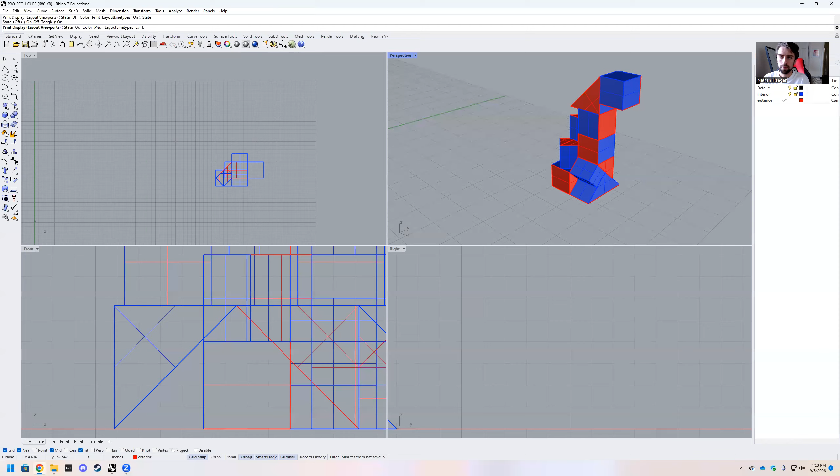Hi guys, I am going to walk you through what you're going to want to do to generate the line work as well as starting on your black and white and colored axons for project one. So we have some towers that you guys have designed, right? These are the ones I made in my last video.

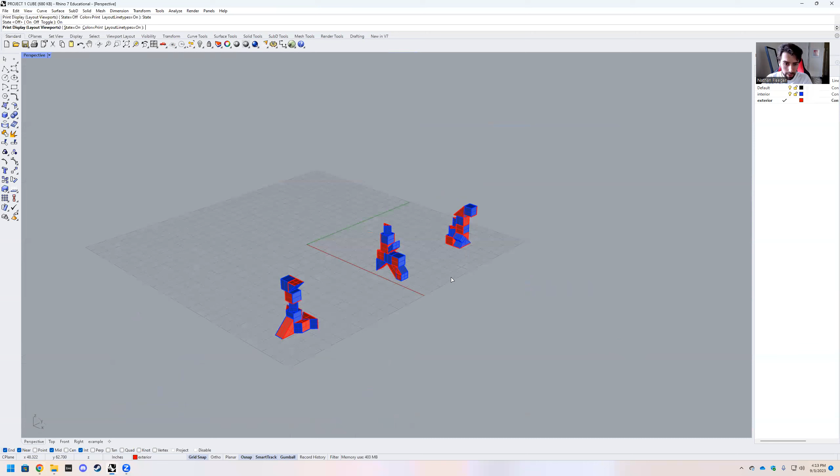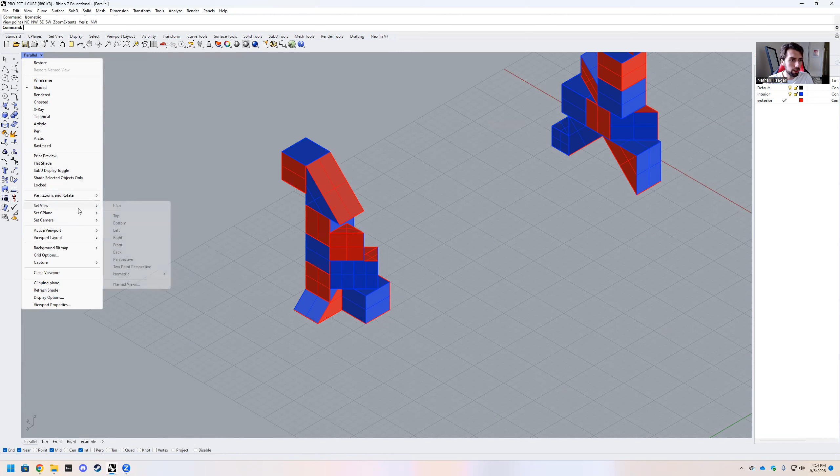And what we're going to do is we're going to start by changing our view from perspective to isometric, right? And so this is what we call the parallel view. And this is just a way for us to work in parallel, right? So an ISO is specifically one of these four views, right? So I had picked Northwest, and I kind of don't love the angle of this tower. So what I can do is I can rotate it 90 degrees.

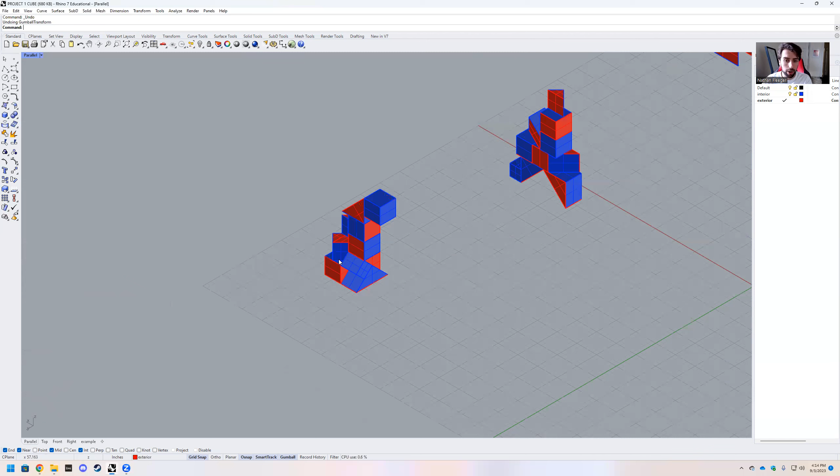Not quite what I want. Another 90 degrees. I think this is more of a cool angle, but let's just see what this looks like. Yeah, I think I liked it last. So if I undo, I really like this view of this tower. And so what I would like to do is zoom in on this. And this is essentially my axon. I want to highlight all of this. And I want to type Make2D.

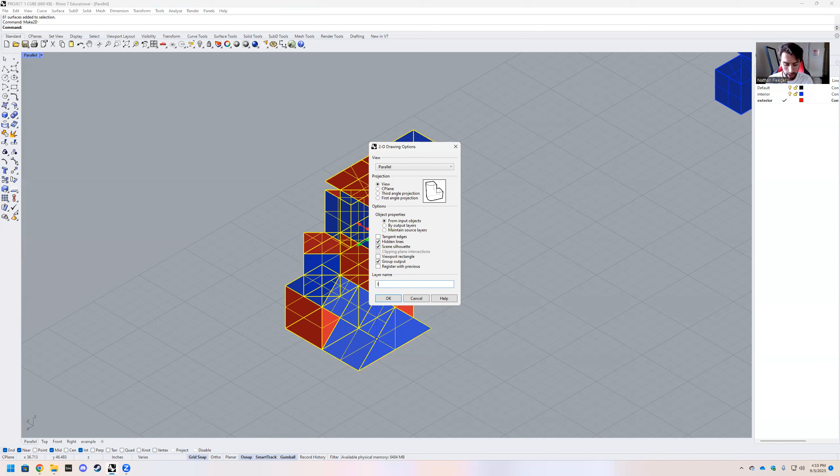And we're going to turn hidden lines on, right? And we're also going to have scene silhouette on as well. And then we're going to type in the layer name, because it's going to create a new layer for this. We're going to type line work. Go ahead and hit enter. And so what this does in top view is it generates line work.

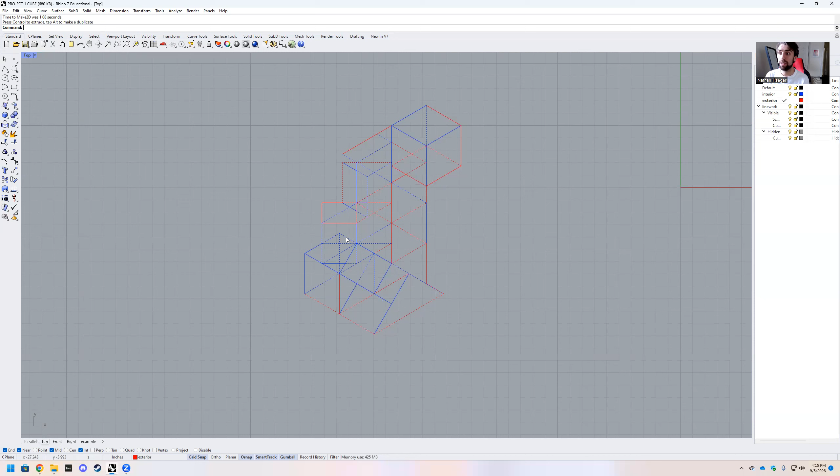And what you can see that has happened is it has kept the color of our interior and exterior faces, as well as shown us the hidden lines, what are happening behind the closed surfaces. So I'm going to move my camera so you can take a peek at this. If you look in your layers, you'll see this line work layer has been created, as well as some layers within that layer. If you didn't know this, you can make layers inside of layers, kind of like folders. You can group them together.

But if you start to toggle these, the visible lines are just the lines in front, the hidden lines are just the lines behind, right? And so what we have here is our cube. I would love to see the names here. Yeah, we have our curves and our scene silhouette. It does not look like it generated much, but I digress. Basically, we have this line work that we've generated of our object. And so what we can do is we can start to take this and play around with the line weights of it.

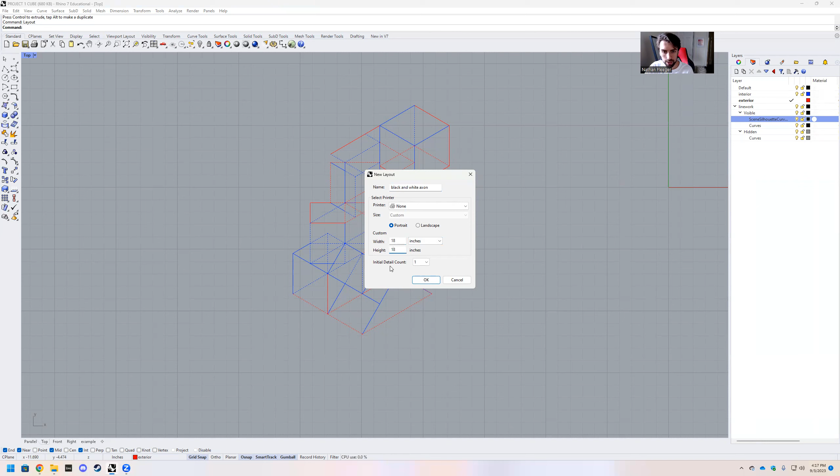So if we type in a command called layout, this is a page that we're generating. So we can call this page, for example, or we'll call this black and white axon. Our width is going to be 18 inches, and our height is going to be 18 inches. That's what the deliverable is. If we go ahead and hit OK, it will bring us to here.

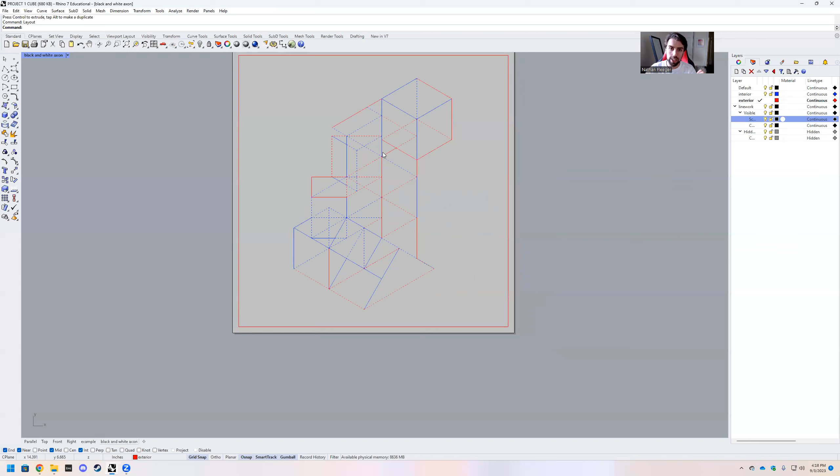So right now our axo is scaleless, and that is okay. So we can just kind of center the plot on this. And when you double click into this view, it lets you edit what's in the view. And then when you double click outside, it brings you back to the page. If you've ever worked in CAD before, this is a sheet view. Revit as well is the same concept. So we have this line work that we've generated from our 3D object.

However, if you'll notice, one of our issues is that we basically don't have any line weights in Rhino. I want to show you how to generate separate line weights in Rhino so you could plot directly from Rhino if you wanted to. I personally prefer organizing my lines in Rhino to export to Illustrator to clean up, but we want to clean up our drawings and make sure that everything is good to go in Rhino before we get it into Illustrator.

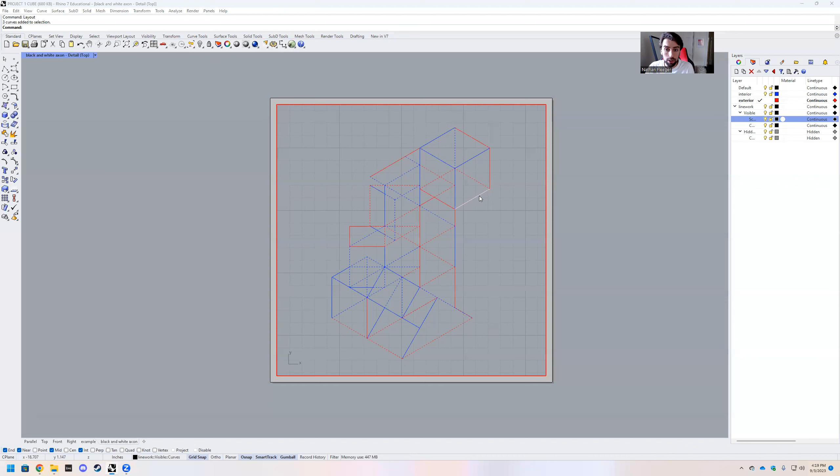So we have these lovely folders that have already been created. So if I click on this line work, we can see, and so right now I'm going to actually get out of this view. If I go down to these tabs, I can go back to my top view.

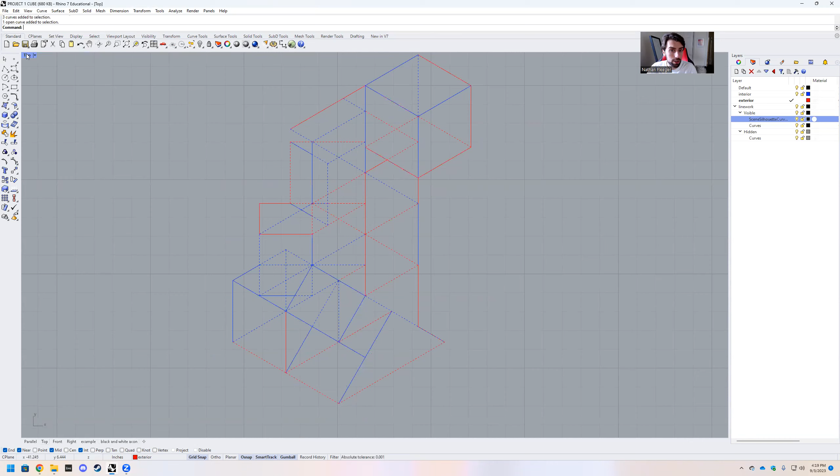So I'm doing that so I can zoom in and out without decentering my plot. It's kind of helpful for me to have this view side by side, so I can just drag these lines down. These are adjustable, in case you didn't know, just so I have a glimpse of what's going on over here.

Just so I can compare back, it looks pretty accurate. And it looks like sometimes we have a hidden line that should technically be, or a part of it should be solid filled.

So what we're going to do is turn off our hidden lines and fill in some of these spaces. The scene silhouette, it looks like, only generated part of the exterior, which is interesting. That will happen sometimes.

What happened also is that some of these lines were doubled up, so it is registering the red edges in certain places instead of the blue, and then marking them as hidden. But this line right here is not a hidden line per se, because it is this line that happens right here. So what I'm going to do is I'm going to change the layer colors.

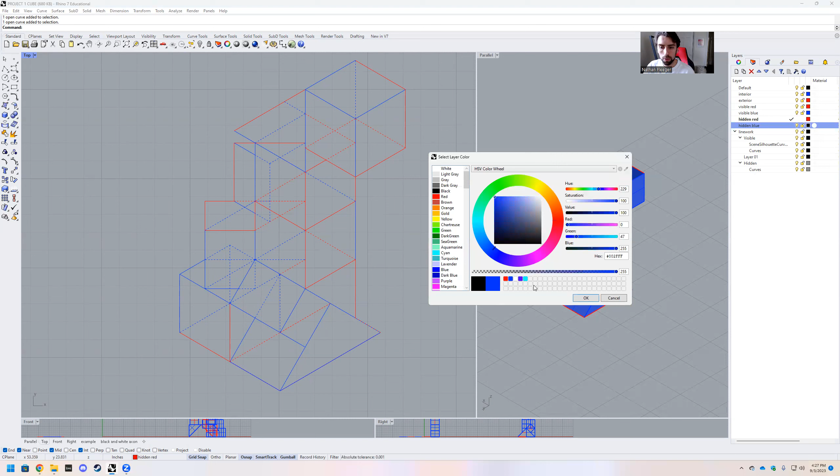We're going to make those red and blue, and assign the colors we want to those layers. So I can grab this line and type cell... actually, when you right click on it, you grab it. I goofed - thinking about AutoCAD, what we have to do is manually grab our lines.

So if we start with a visible red, we're going to grab this line and put that on change object layer. What I like to do is keep these layers off, so when you move a line, you can see when it moves. These lines right here are actually supposed to be blue, so we can put these on visible blue, change object layer.

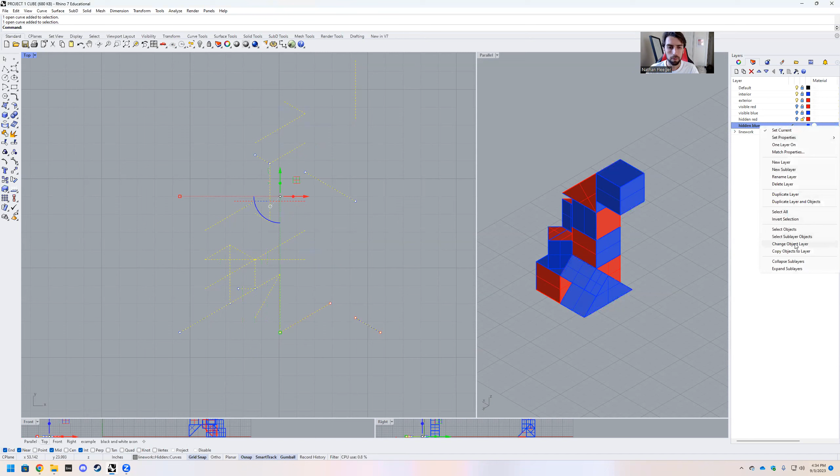Now we're going to take our hidden red lines. We're going to put these on hidden red, object layer. Turn that off, and then we're going to go hidden blue - basically just grab all our remaining blue lines. And so what's really funny is these lines have become solid because of the layer they're on, which is the opposite of what I wanted each layer to be.

So what we're going to do is now we can go into the line style properties. If I drag this over the print width, we have color, line type, and print width. And so the line type for all of these layers is set to continuous.

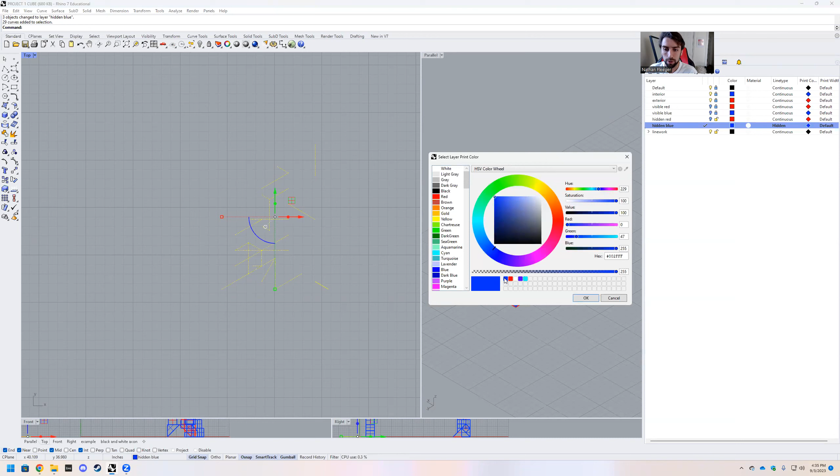So if I do this one layer at a time - for example, this is my hidden blue line, but there's red lines and there's solid lines. The line type is going to be hidden, color is going to be blue, the print color is going to be blue, and the print width, because they're hidden, I'm going to make it 0.18. Hit OK.

And then just, again, put all of these on that hidden blue layer. And then when I grab all of these lines, if I go to properties, we want all of these layer to be hidden blue - display color by layer, line type by layer, print color by layer, and print width by layer. So we're setting the layer properties, and then we're gonna change all the line properties to be whatever the layer properties are set as. So there's all our blue lines that are hidden.

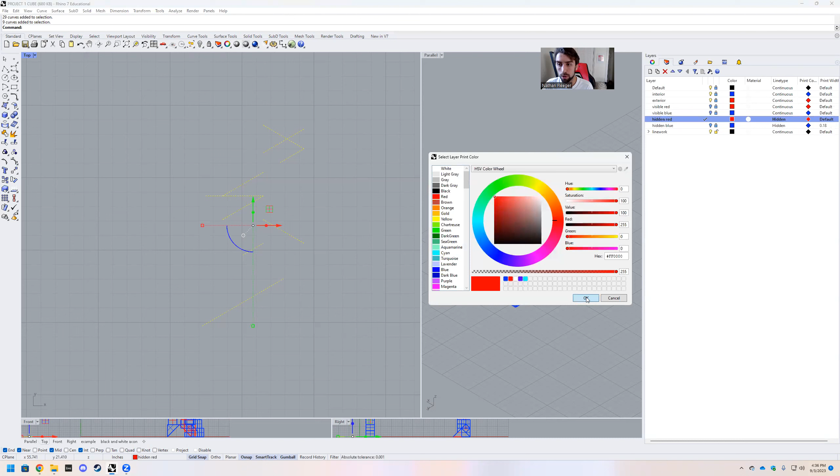Now we can go do our red ones. Turn that off and lock it. So first, again, these are hidden lines, so we want these to be hidden. We want the print color to be red - it's already set. And we're going to do 0.18 for our hidden line weight. And then in properties, all of our layers that are selected - display color by layer, line type by layer, print color by layer, and print width by layer. All right, 2 down, 2 to go.

These are our visible blue lines, and you see there's some red stuff in here. We actually are going to explode, or ungroup excuse me, this. Get rid of that line. Grab all of this - visible blue layer. We want continuous, that's good. We're going to make this, how about 0.3? Just a thicker line, right?

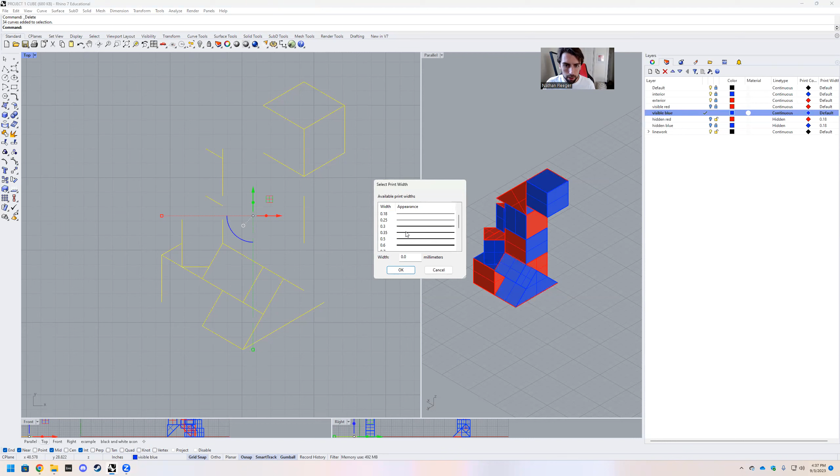That's good. We're going to make this, how about 0.3? Just a thicker line, right? Then we're going to go to our properties, make sure everything is by layer.

Enter, click out of it. Then if we go to visible red, grab all of these lines, this line right here. Go ahead and type trim. This line is not there. Okay, grab all of these.

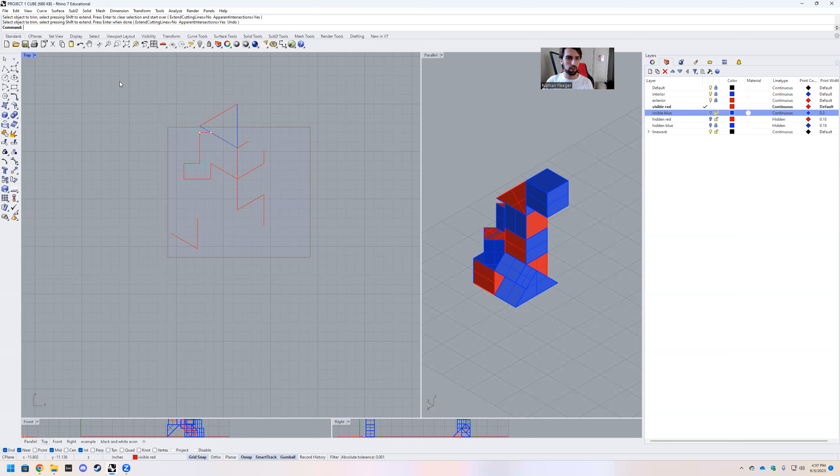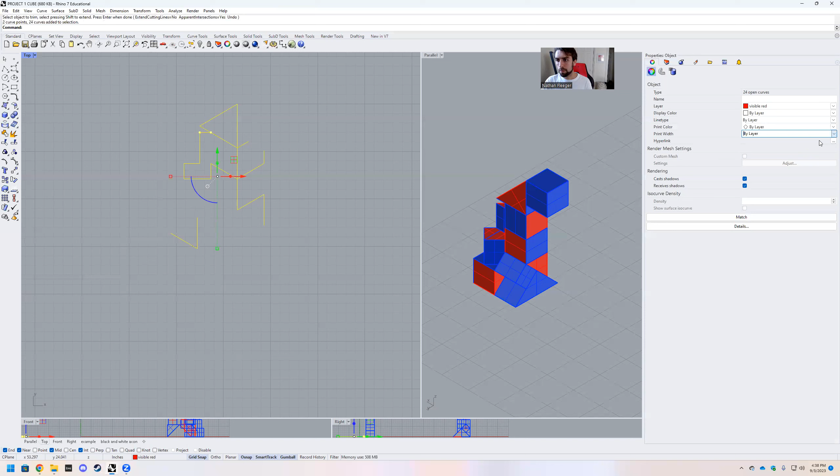Continuous, 0.3. And then again, just go through and make sure all of this is by layer. All right, so when we turn these lines on...

This is a more accurate drawing of what is going on here. And I just see that right here, we're going to have a hidden red line. So if I go to the hidden red line layer and draw this, it is hidden automatically because we have our layer settings. And so what we have now is our interior and exterior faces are denoted with hidden lines and solid lines.

And we can go back into our print display and just double check that everything's looking good. And it is looking good so far.

I see a couple of things that I want to just clean up, like this line, for example, is on a locked layer. This curve should go on the visible blue layer.

So when I change the object layer, it corrects itself. But other than that, I think what we can start to do is we're going to want our interior to be dark. So all of our blue faces, we want to make dark.

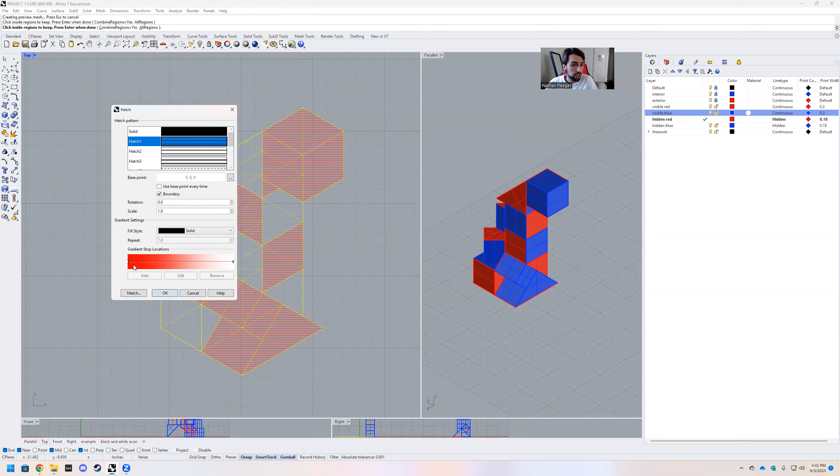And if I want, basically these hatches are groups. If I can just grab these, I can make another new layer, name it hatch, and we can set this to be blue. Go ahead and change object layer to that layer.

And now we have this blue hatchwork, and this drawing is showing what is happening on the front faces, the back faces. I see some of these. If we go ahead and type SelDup, these are our duplicated lines, where that means there's a line right on top of another line exactly like it. So if we hit delete, that'll just make life a little easier.

I just want to change some more of these lines. That line I think should be red. And yeah, I mean, this looks pretty great.

So what we can do is we can type, if we go down to our black and white Axon sheet, this has come together, and we can type print display, state on.

And what we can do is start to grab some of these. Perhaps I did not make the difference. If I make this hatch like hairline, as well as a couple of these, if I bump these up to like 0.6, let's bump each of these up to 0.6. And it looks as if...

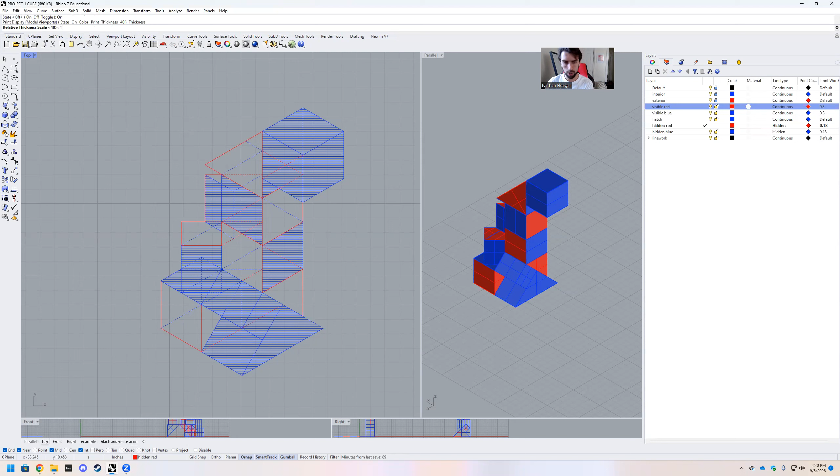Try again, hitting print display. Oh, state off, toggle on, thickness 40. There we go. Now we can start to see some differences. We want to set this to be maybe 0.25.

I'm going to pause this for just a moment, figure out what is happening. Sorry about that. It would appear I just was zoomed in really far and you couldn't see the differences, but I fixed that, and so that shouldn't be a problem on your end.

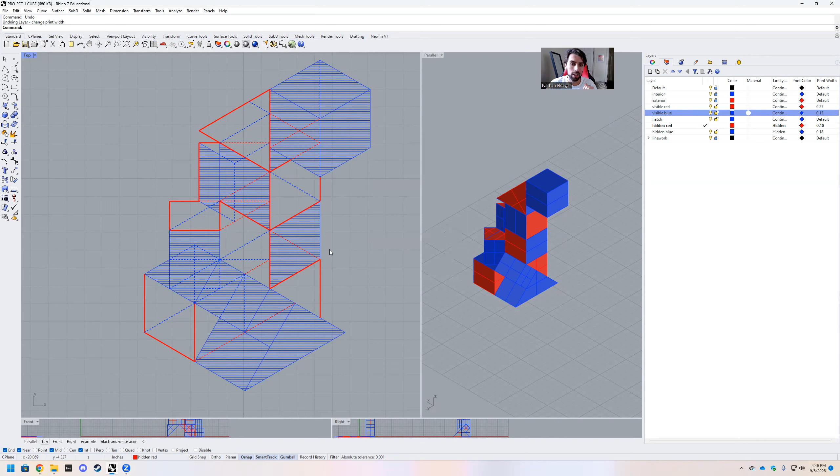For example, we have these line weights, and it looks like some of these lines are kind of thick. So what we can do is, for example, the visible blue, what happens if I bump this down to 0.13, see how that drops back. And if we want like our hatch, it's set to default right now.

Let's make that hairline. And the hatch displays a little differently than the lines, but if we grab our hidden lines and drop those to hairline, our hidden red drops down. If we grab our hidden blue layer and grab this and drop that down to hairline, you can see how it starts to change. And our visible red is pretty beefy relative to our blue. And so this is kind of what the default looks like.

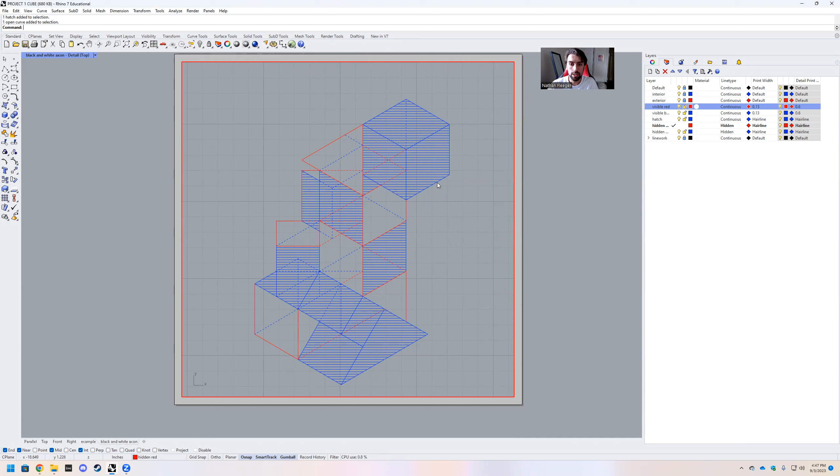But when we change that over in here, we can start to really see what's going on. So if we hide our hatch for a minute, let's play with our visible print widths.

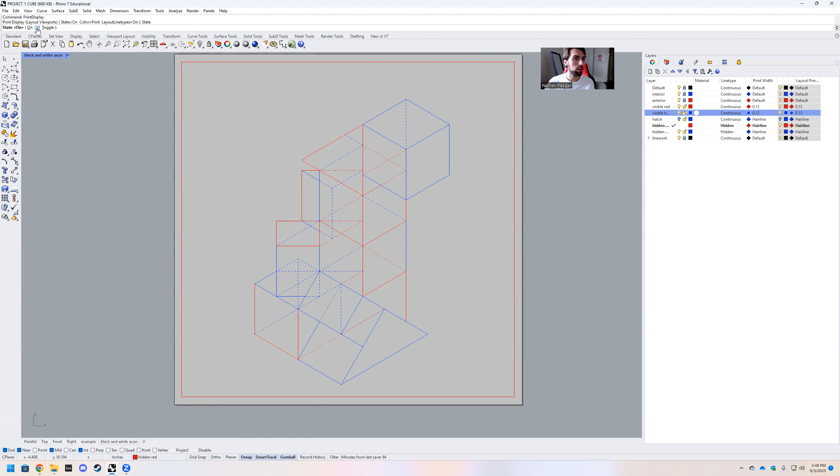Print display. Oops, sorry, print display. We want our state to be on. Enter. And this shows up a lot better in the top view.

But if we start to just bump these up, 0.3 seemed a little too heavy. But if we do 0.25 and 0.25, have our hatch on, and then have our hidden lines at hairline.

We can also change, because this is supposed to be a black and white drawing, our print color for all of these layers to black. It's going to go through, change our print layers to black.

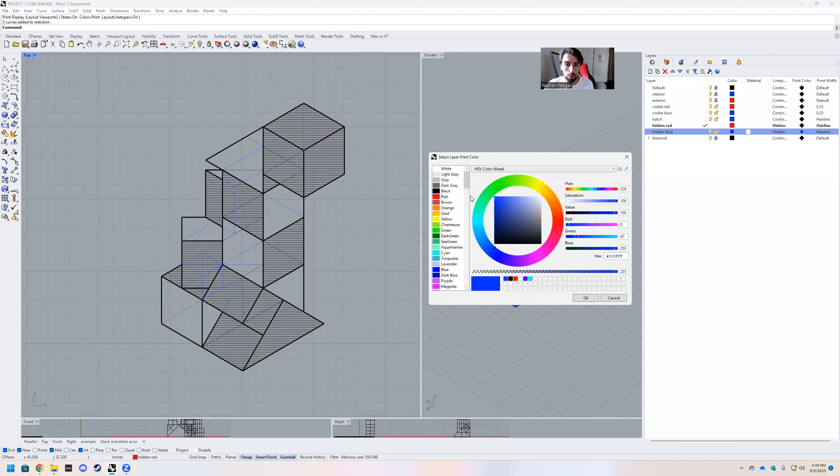And so this is going to show you what your print is going to look like. And so this is a really nice hatched Axon for black and white. We can use this line work when we bring it into Illustrator for your color drawing in the next video, but this looks pretty clean.

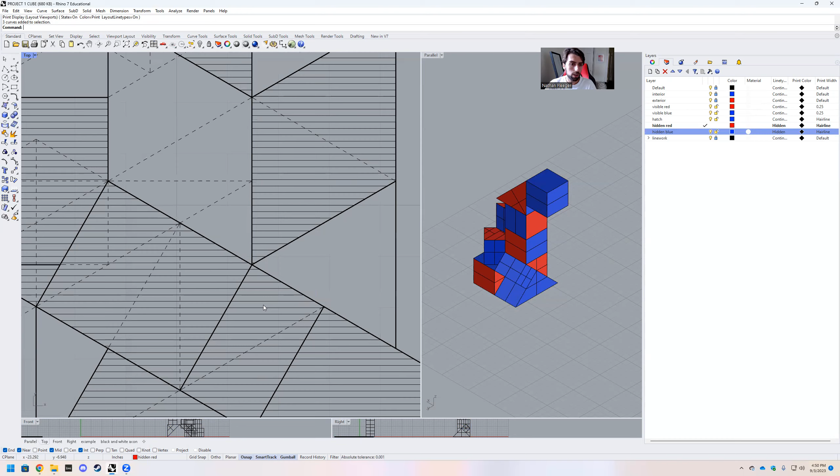Honestly, with this particular view, the zoom has a pretty intense effect on the line weights, so it could be distorted based on how your zoom is functioning. So please zoom in to get a better look at this.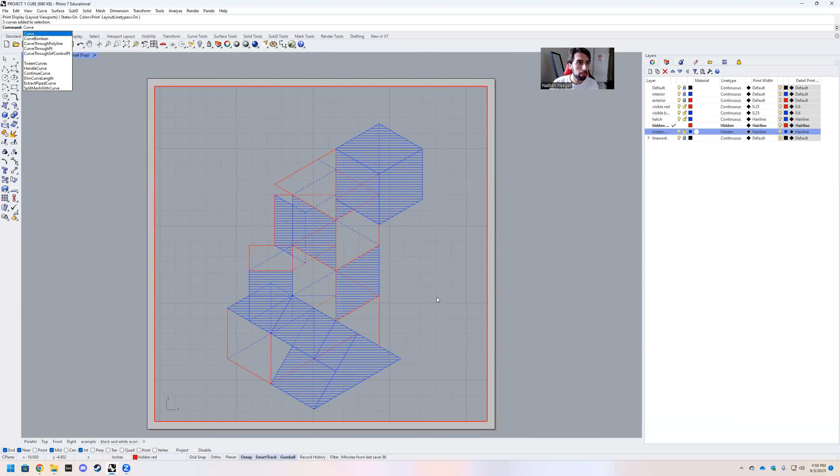One final thing that we might do is we're going to curve Boolean this. Curve Boolean. And highlight all of your lines. Hit enter. We're going to grab the outside. Go ahead and hit enter.

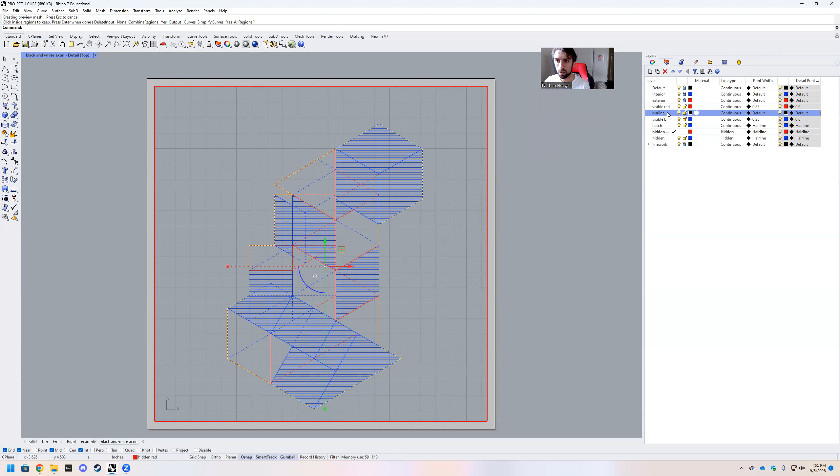And this exterior line, we're going to bring up to a new layer. We're going to call this outline. Change object layer. And we're going to bump this line weight up to 0.35. All right, and so we click out of that.

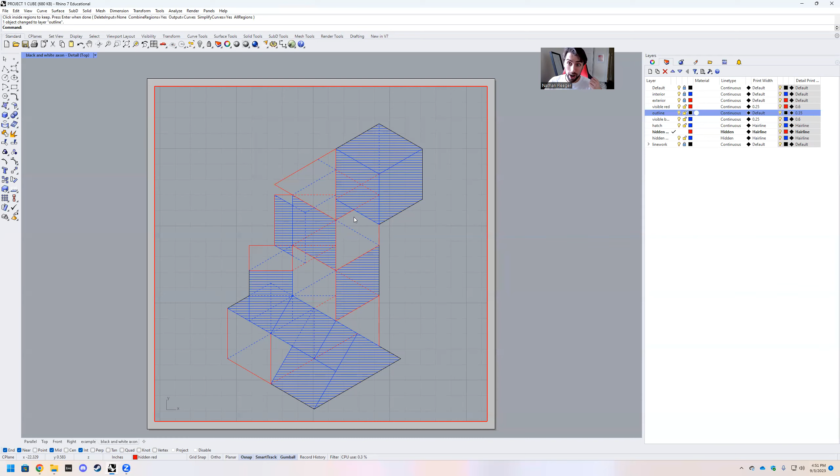You can see it goes from the display within Rhino to when you click out of it. This is the print display that we have set. And so our layout color and our layout print color are different from our display color, which is set in our views.

But yeah, here in the top view, just having an outline. So if I turn these off, this is our outline, and we want that line to follow everything by layer.

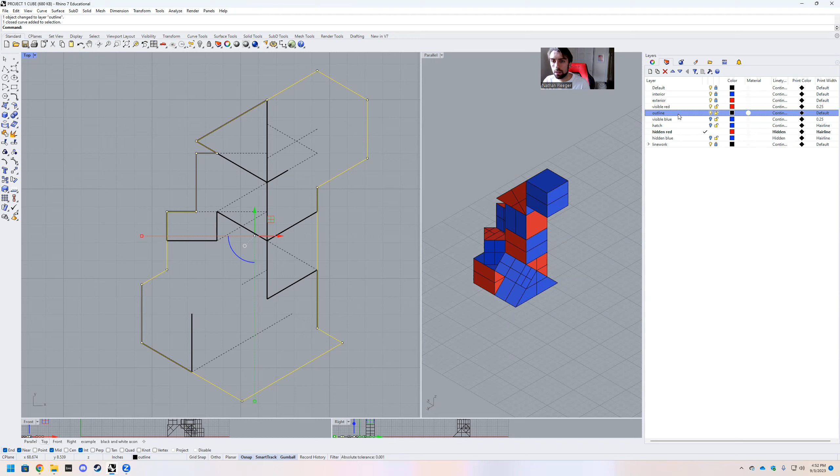We just want this print width to be 0.35, hit OK. And so that's going to make a thicker line. This is just something that we like to do, is have the outline of our drawing show up a little thicker than everything else.

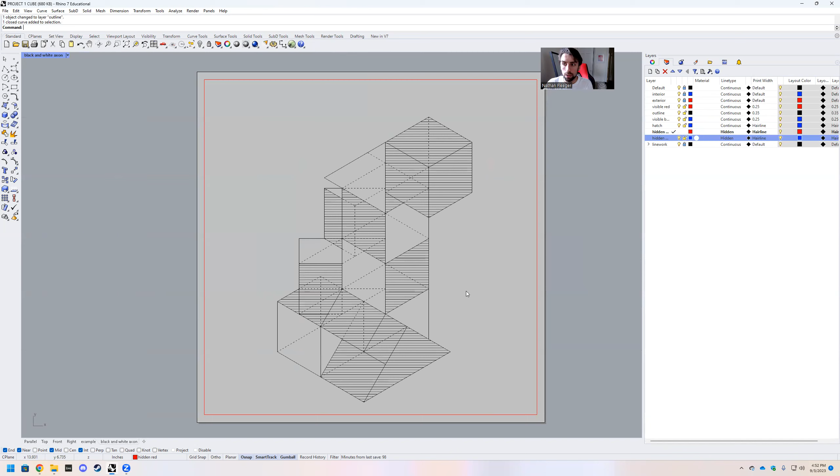And that will translate into this drawing when it updates in our settings. Oop, I've undocked my layers by accident. I want to put it back, please. Thank you.

And so we want our layout prints. We're gonna change our layout colors to black as well, just to make sure everything is looking good.

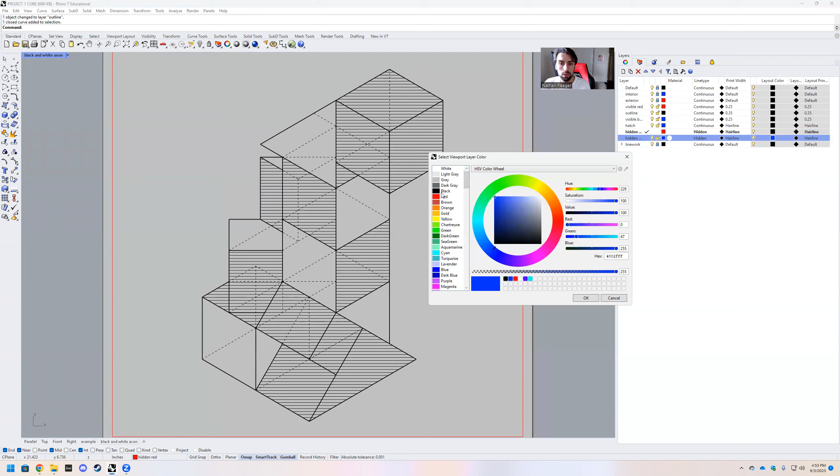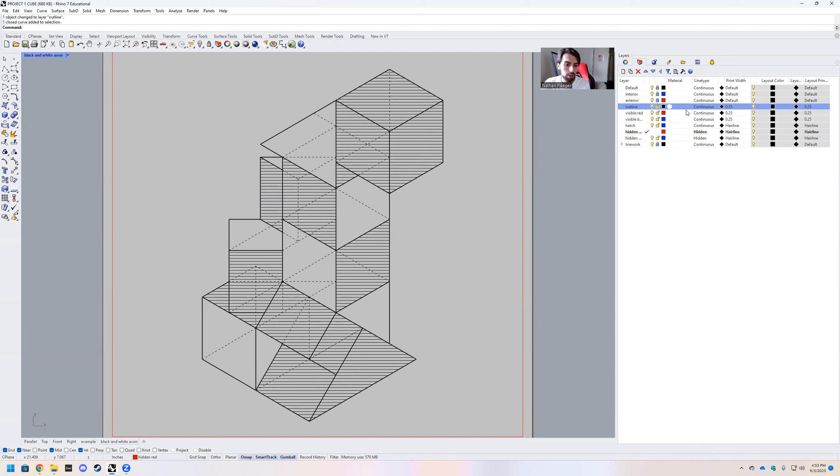And this is how you can just quickly generate line work. I tried to take it nice and slow so you guys could follow along, but each of our layers has a line weight. We're going to bump up the layer order just so our outline is above. It doesn't read as well on our print width, but when you zoom in, you can start to see some of these different layers. So this curve, properties, everything is by layer.

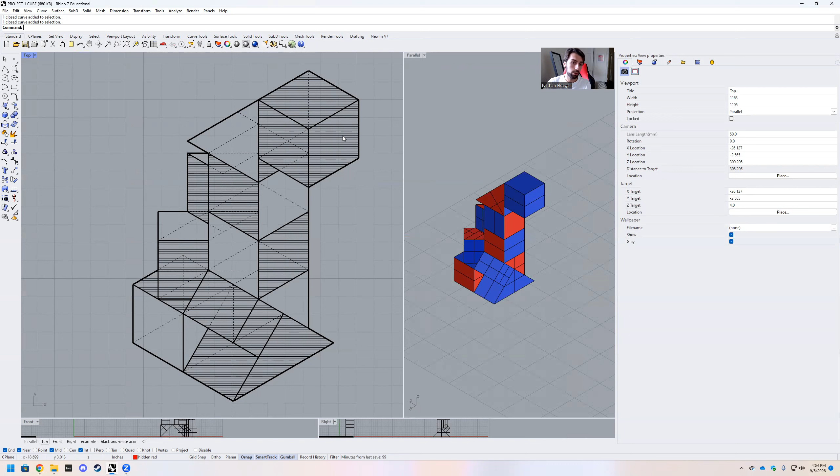And just one more time back in our top view, this looks really good. And so you can take this layout and you'll go to file and you'll hit print, and it will pull up the Knowlton plotters, and you can set that to be your 18 by 18 drawing. I believe it will have to be printed on an 18 by 24, which is an Arch C, and then you will manually trim it with a knife, and it'll be really good, but it looks great.

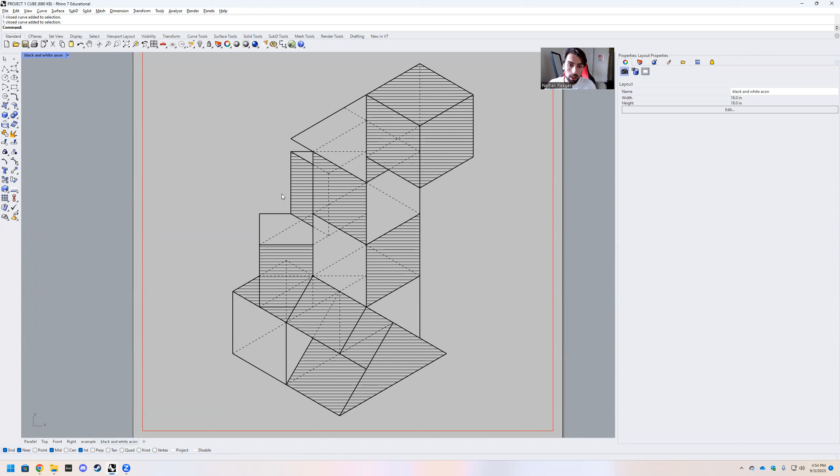This is how you make your black and white drawing. We'll be around to answer any questions. In the next video, we're going to talk about how to get this into Illustrator and Live Paint. So that'll be really fun.